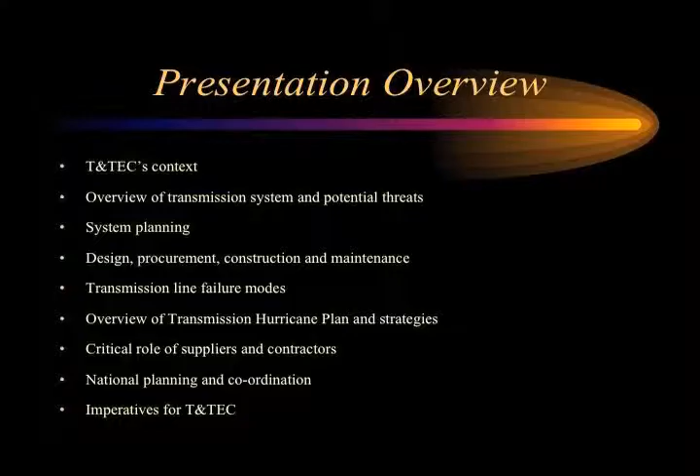T&TEC was established by Ordinance in 1945 and by Act in 1970. We have about 440,000 customers, all metered through the automatic metering infrastructure, 2,700 employees, and approximate sales of 8,500 gigawatt hours. Current peak demand is 1,332 megawatts, and our generation is private, so we have IPPs, three generating stations: PowerGen, Trinity, and TGU. We have our own generation in Tobago, Cove generation. We have one of the lowest rates in the region, 6 US cents per kilowatt hour, and of course we are regulated by the Regulated Industries Commission.

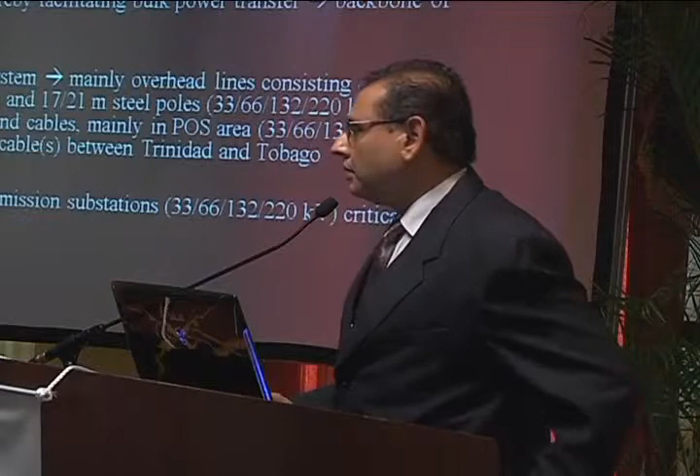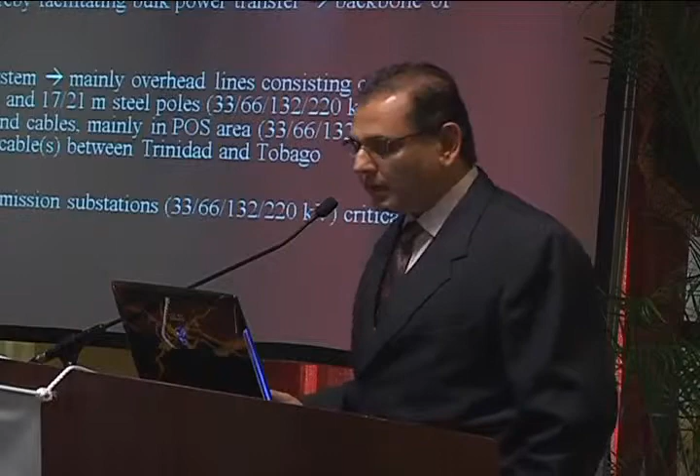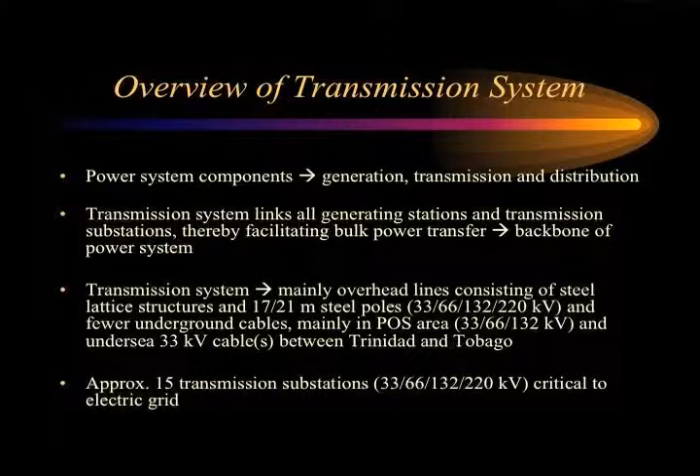Just an overview of the transmission system. Generation, transmission, and distribution all make up the components of the power system. The transmission system plays the role of linking all generation stations to transmission substations and each other. In the case of T&TEC, the transmission consists mainly of steel lattice structures and poles, 17 and 21 meter poles. Our voltages go from 33,000 to 220,000 volts, and we have underground cables, mainly in the Port of Spain area, from 33 up to soon to be 132 kV. There is an undersea cable linking Trinidad and Tobago that operates at 33 kilovolts. We have approximately 15 transmission stations that are critical to the grid, and a few of them are super critical in the sense that if they go down, most of the country will go black.

Potential threats: we're looking at this presentation from the natural disaster standpoint. Overhead lines, hurricanes, as we heard before, the previous speaker spoke to that. Lightning as well, and I was happy to hear this morning the Caribbean Meteorological Office talking about predicting lightning or developing lightning models. That'll come in handy for some of the management of lightning, landslides, and flooding.

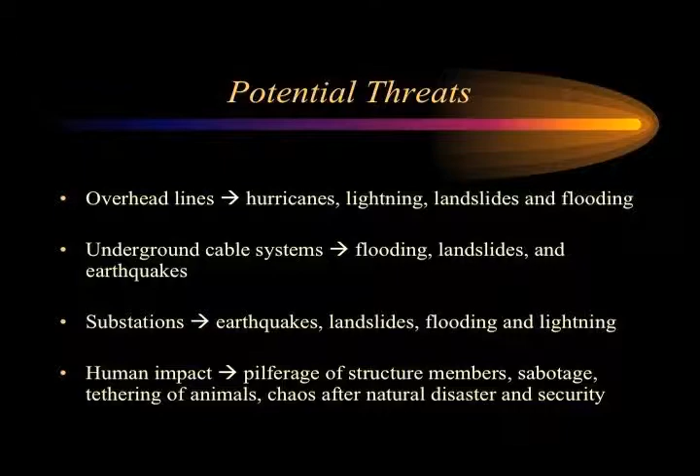Underground systems are susceptible to flooding, landslides, and earthquakes. Earthquakes affect the cable systems and the distribution systems more than the transmission because of concentrated loads. Of course, the substations are affected by earthquakes - earthquake, landslides, flooding, and lightning. These are the kinds of potential threats we have.

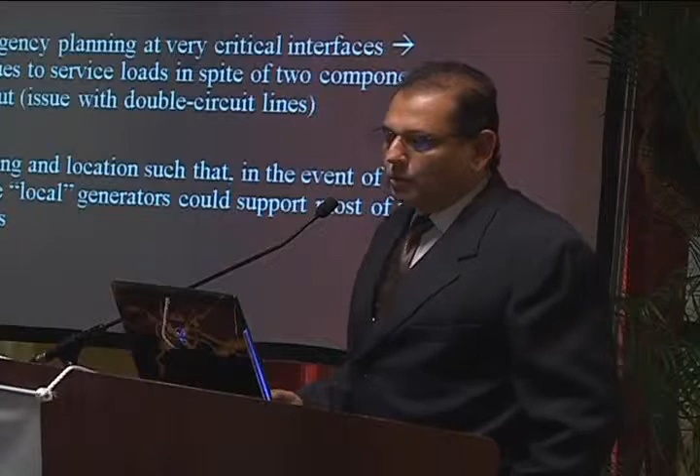If we look at the activities to establish any system infrastructure, there's the planning aspect. What we do, we have single planning contingency, that is, if one component is out, the system could survive and carry the load. We have double contingency as well for critical interfaces.

Where we have more than 5 lines or so terminated in a particular area, we design for double contingencies. A lot of our major circuits are double circuits. Double circuit means you've got 2 circuits on one structure. That has a weakness in the sense that if you lose the structure, you lose 2 circuits, so it's like a double contingency for one event. I'll talk about that a little later.

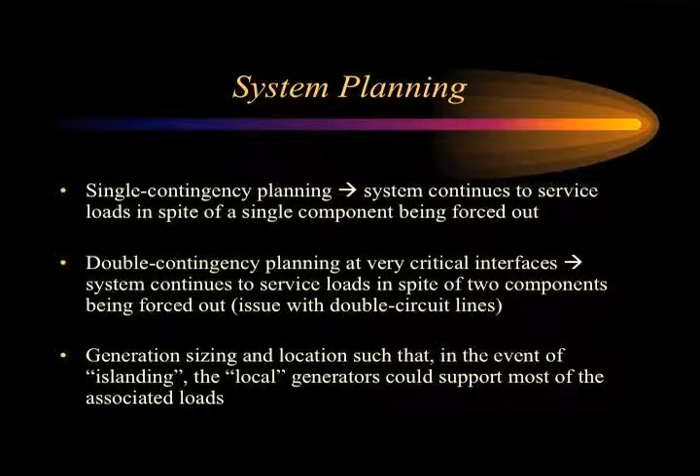Generation, sizing, and location. What happened in Trinidad is our generating sites are located in such a way that if we have islanding - and what is islanding? Islanding is if you have major transmission disruption, the system breaks up into so-called islands where Port of Spain could be disconnected from Point Lisas and San Fernando and so on. And the generation in the locality would be able to carry most of the load. That is not a deliberate design, but it has come out of the planning for generation close to load centers.

So the way we have it right now, Tobago can run on its own with the new plant there. In fact, the plant is about nearly 1.5 to 1.75 times the load in Tobago. South is more than adequate with the new generation - it can support itself and feed the rest of the country. Point Lisas, close to this area, could take care of the central.

The challenge is in Port of Spain. That plant was at 300 megawatts and could have sustained Port of Spain and the near environs, but the plant is the oldest plant and it's soon to be decommissioned, so it's really not reliable. So if we do have such an event of islanding, hardly likely that station will be able to sustain Port of Spain. Design.

Routes. Line routes - this is very important in terms of reliability and even security. If we're looking at the single contingency, obviously it would be better to route one line or one circuit, and the second circuit will be far apart. The constraint really being the land, available land. And in Trinidad, we have quite a constraint in the available land for routing lines and even substation sites.

What I've said in the first point is our major transmission is on the western side of the country, and that has happened because of the industrial development. It stretches from La Brea south up to Port of Spain, and it's almost on the west coast. So the major transmission is on the western side, which is good in a sense that if we looked at the hurricane belt and the slide that Engineer Gibbs showed us, Tobago is more susceptible to higher wind speeds and the northeast Trinidad, but the south and the western is less susceptible.

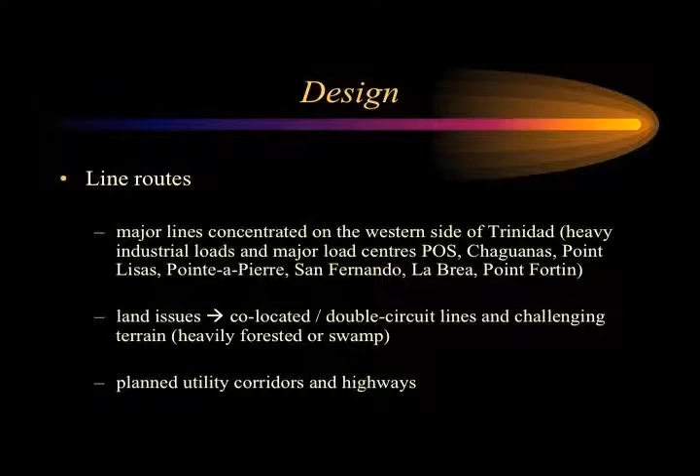Downside is that some of the infrastructure is very close, and in fact the 132 kV intended route is on the waterfront. So if we have any kind of storm surge and so on in the Gulf, it could affect some of the infrastructure. We discussed the co-located lines - because of land issues, we have to co-locate lines, and we have the double circuit. And of course we have challenging terrain like heavily forested or swamp areas. Engineer Williams spoke about that and the effect of vegetation management and so on.

What I think we lack in the country is coordination for planned utility corridors and highways. These could do well - joint corridors would make better use of the land, and we can discuss disaster planning with the joint and coordinated corridors approach from the planning stage.

Substation design - we're looking at close to load centers. Generally, we locate substations close to load centers. Now, we had a lot of discussion earlier before the break on flooding, so there's really more detail on flood design and so on. But generally speaking, we have the turtleback design and, of course, the drainage with all the hydrology that goes with it.

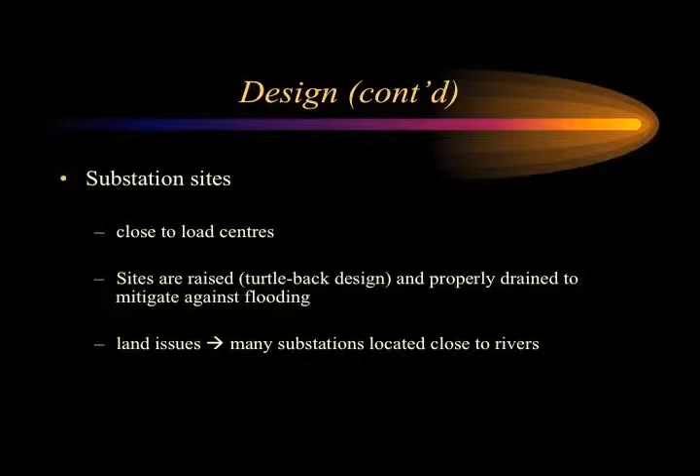Problem in Trinidad: land issues, and many of our substations are located close to rivers. In fact, 2 to 2.5 years ago, one of our major transmission substations was flooded out. The way it's located, it's almost like in the center of a bowl - it's the Harmony Hall station close to Ready Mix at Gasparillo.

The roadway is higher than the substation, and the river is close to the substation, so the water will naturally collect there. As Dr. Khan mentioned before about pollution in the rivers from dumping garbage and so on, that contributed a lot to the backup. The Guaracara River flooded and we suffered some issues there.

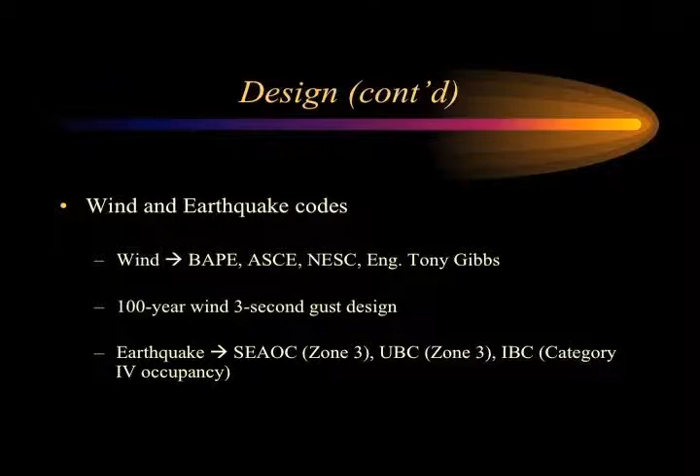At one point we spoke with Professor Chin about the use of the CUBiC. He was invited into TNTEC around 1998 or so to see the application of the CUBiC, if we could use it in our design. So that discussion has to go on. I think Engineer Gibbs spoke about that this morning. We need to get the relevant codes and applications to the region.

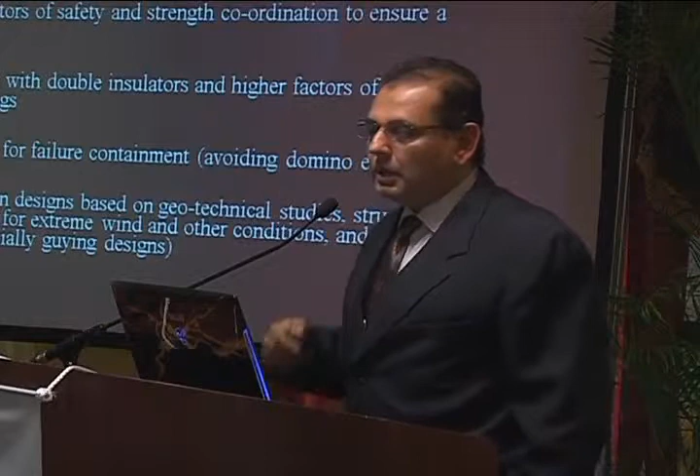In terms of the line itself, the structures are designed for various mechanical conditions, including broken wires - everyday winds, high-speed winds, broken conditions, and appropriate safety factors. So one designs for certain failures that will naturally occur, and designs the structures to withstand these problems. We'll talk about strength coordination a little later, in terms of how the whole transmission line and different components interact with one another.

Some of the recent design improvements we've made: we use strain structures with double insulators and higher factors of safety at highway crossings. So imagine these things crossing highways - in a hurricane event or any natural disaster, we want stronger structures at those points. We also look at strain structures for failure containment.

Now, this isn't so much a problem in Trinidad because we hardly have a straight line between points - we always have lots of turns because of features and land issues. So inherently we have lots of strain structures per kilometer in our line. But in places like the States, where you have hundreds of miles of line and a good section could be a few tens of miles, you get a domino effect - if you lose a structure, many of the suspension structures fail. So that's failure containment using strain structures.

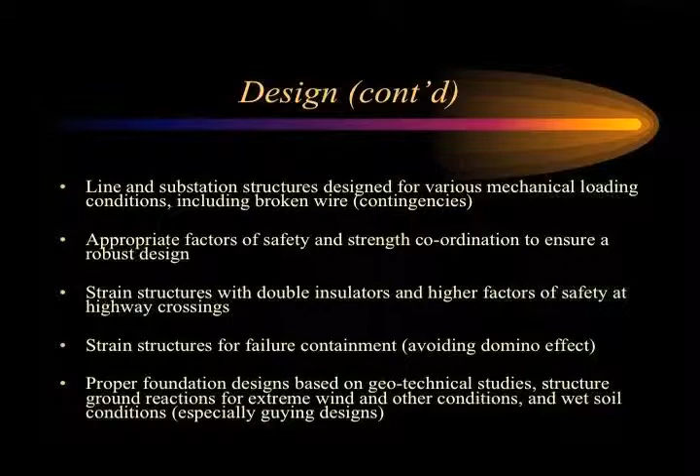Now, proper foundation design - the speaker before mentioned foundation designs and guying designs. Obviously this is standard civil engineering practice. But especially for guying designs, we have standard guying arrangements, though one guying arrangement wouldn't satisfy all soil type conditions. We also have to consider the effect if you have wet soils or wet conditions - would the guys be effective? That's something we look at, especially at the transmission poles.

Okay, we went back there, so we go forward - that was revision. In terms of lightning, these are standard practices, nothing cutting-edge here, but something we need to address. We look at the highest keraunic level at Piarco, but now with weather systems mapping lightning a little better, I suppose we'll get better information.

Of course, the standard practice of surge arresters at the interface - lightning will come with the storms and could knock out the system, damage equipment, etc. So we need to design for lightning and appropriate basic insulation levels and so on. It's not a lecture on insulation coordination, but just to mention some things we need to do. It's important to have low footing resistance to prevent back flashovers, which means you can have an outage from lightning that doesn't strike the conductor directly.

Sufficient electrical clearances, line corridor widths, and building setbacks are needed. This depends on the policy of the utility, and our policy is to keep the lights on during the hurricane. You need to cater for blowout.

Now, this is not electrical blowout, this is the mechanical movement, or physical movement of the conductor with high wind. So you need to set sufficient clearance from buildings and other structures or other lines so that you don't cause electrical shock or damage or trips. This means, of course, it could entail having wider corridors and land issues. So that is something to bear in mind.

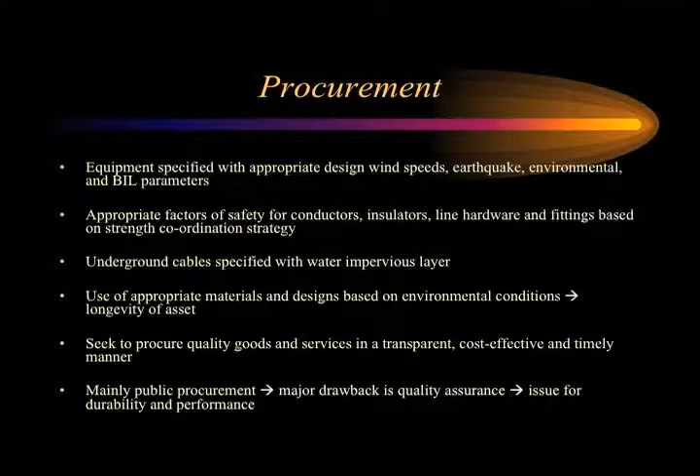Let's look at procurement. Of course, the equipment must be specified with the proper design, wind speeds, earthquake criterion, environmental and BIL parameters. Appropriate factors of safety for the different elements of the line hardware. Now, in our case, I suppose most utilities, underground cables, we specify an impervious layer, so we expect flooding and so on. So if it's impervious, it will improve the performance.

Of course, the appropriate materials for the environment, if it's coastal, if it is highly corrosive, etc., then this is key, and we have a major challenge in Trinidad to procure quality goods and services. We have to use, by and large, public procurement. As I said in the first slide, we are a public utility, not private, so we have to do public procurement, and we do get quality issues. And this is very critical, and I could never overstate the importance of having quality materials.

Construction, of course, must have the competent workforce and a contractor. Again, we talked about goods and services, so you may have good materials, good designs, everything, and if your construction is poor, it doesn't work. So proper construction techniques, tight quality control during construction, material specification, and so on.

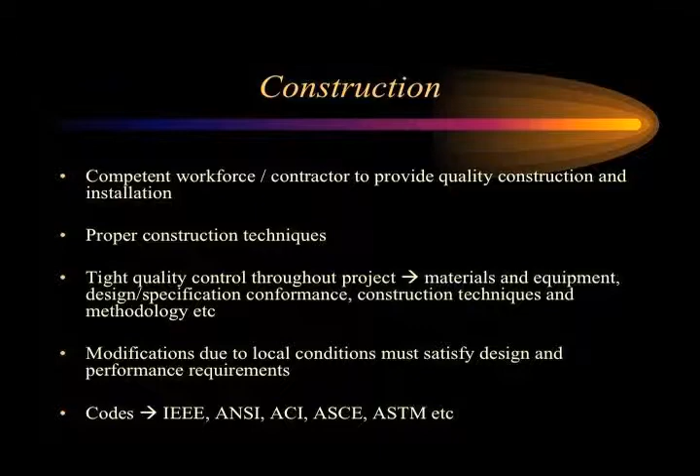One thing though, not everything on paper, you design on paper, could happen out in the field. So if you have to make any changes, it must satisfy the design and performance requirements. And those have to be vetted. So you just don't make changes. Our contractors have the temptation to change the design out there, thinking that they know how it will work, but that has to be verified and so on. And of course, the codes we use there for construction.

Maintenance is critical, and some speaker before mentioned it, and we are weak in this area, whether it's drains or generally speaking. Periodic inspections on infrastructure to identify the condition. Planned maintenance based on that information. Aggressive vegetation management. Of course, our problem is land issue versus expanded right-of-way. There's always a trade-off there.

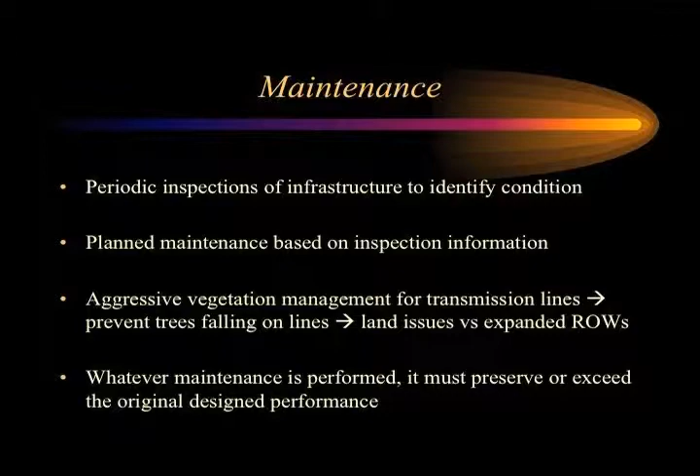Then, in the case of maintenance, whenever it's performed, many times we have quick fixes, and it compromises the original design and performance specifications of the line. So we have to ensure that whatever maintenance we do, it must restore the original or exceed it.

Recently, a couple of years now, they're talking about utility hardening. What utility hardening really is, is to improve the infrastructure to meet the worsening weather systems, and as was predicted, we'll have worse weather conditions in the future from the point of view of storms and so on. So if maintenance is done or refurbishment, we could look at hardening, looking at higher wind codes or higher earthquake design, whatever's appropriate. Of course, everything we got to balance with cost.

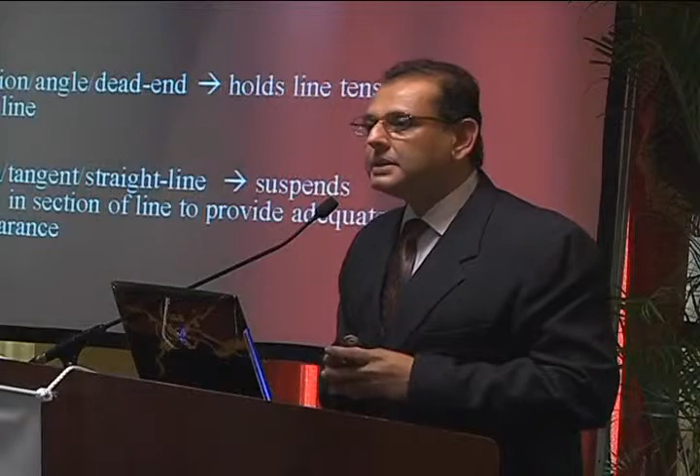Let's look at the transmission line failure modes. Components, basically the foundation, the structure, the conductors, and the insulator line. A term I learned from Engineer Gibbs is that a transmission structure could be considered as an aeroelastic structure. So think of the whole thing as one.

Two types of structures generally: we have the strain, tension - these are different names for the same thing - strain, tension, angle, dead end, which basically holds the tension of the line. Then we have the support structures, which will be the tangent, the suspension structures.

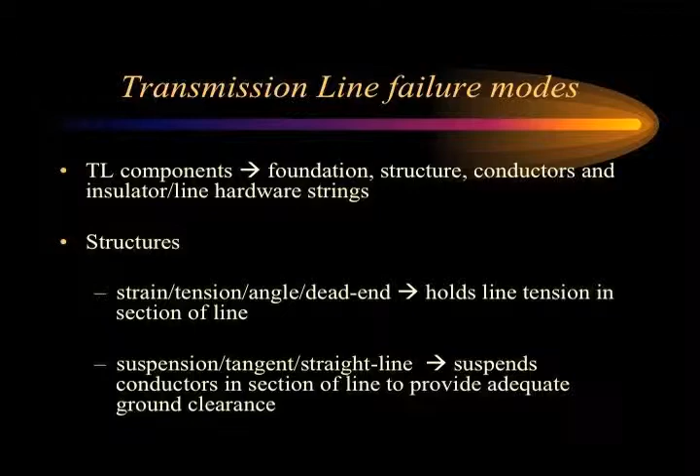The problem is, if you lose the strain, you have more damage. But if you lose a suspension, chances are the conductor will hold up the structure. You will see that happening in many cases.

Failure modes: of course, if we have soil erosion, landslides, earthquakes, human impact, these could affect the foundation, weakening its capability to withstand any event.

Structure failure, the broken conductor, broken member or burst wire, because the whole thing works as one structure, and they work in tandem. Failed insulator strings, that's another component.

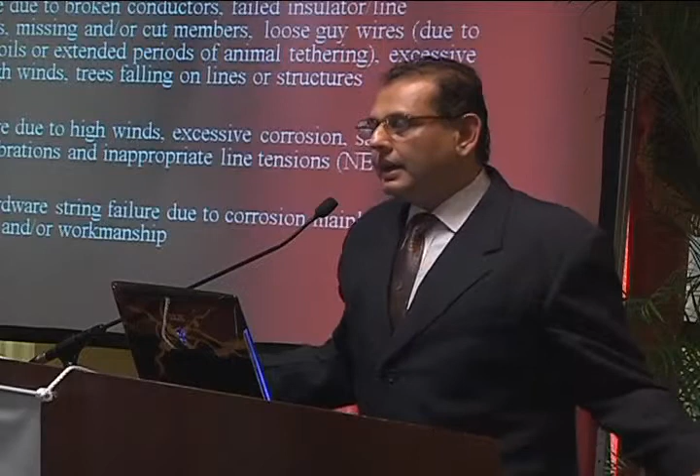Missing or cut members, I mentioned the pilferage or sabotage. Loose guy wires, and these things happen especially during wet conditions where the guy blocks might pull out, and we have a problem there. Or because of excessive periods of tethering of animals.

And of course, excessive corrosion. So your components could be corroded and would not withstand events like high winds, fallen trees, etc.

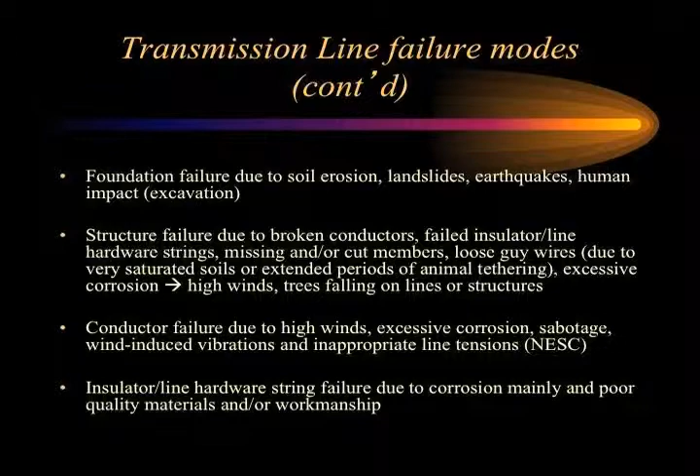Conductor failure due to high winds, corrosion, sabotage, wind-induced issues, and inappropriate line tension. That is very critical - the line tension is one of the most important things you need to monitor during construction. People tend to do stringing by sight, but we need to reference it to the proper design tensions. Insulator, hardware, and string failure due to corrosion - we've had those problems.

So these are all things we need to look at.

One could say, let me have a very strong structure, say go 2.5 or something, take a 1 on the conductor, and probably go low on the insulator. The problem is, if during a hurricane event you lose your conductor string or your insulator breaks, you subject the foundation and structure to very severe loads.

Those could be prevented if you put more strength in the conductor and the insulators, letting the line withstand the hurricane force winds so that you don't have that problem. So this is an approach.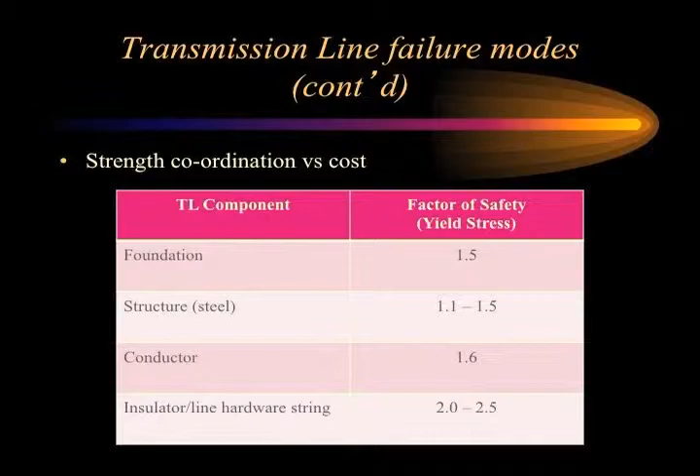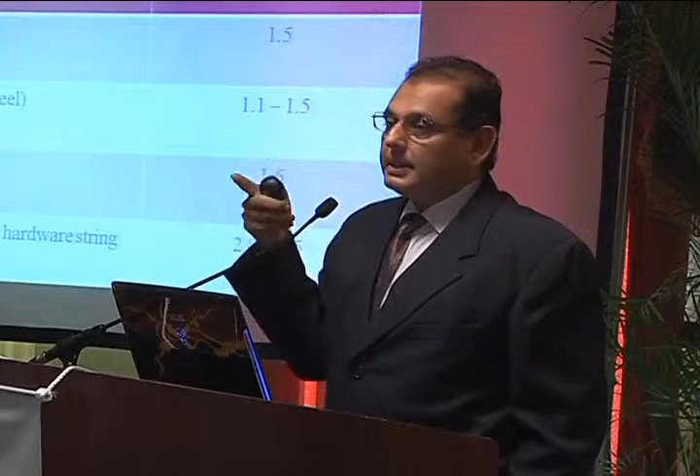Some utilities would take the foundation factor of safety a little lower than 1.5. They allow the structure to lean, so that if the foundation is at a reduced factor of safety, the structure, if it leans, wouldn't have to withstand that full force. Their policy is to de-energize the line before the event, allowing it to lean, then they come back, straighten it, and energize it. T&TEC, of course, we keep it going as long as we could.

Now, let's look at the hurricane plan and some of the strategies. Some have been well dealt with by the previous speaker, so I'll run through that quickly.

Here, our main feeder of fuel is natural gas, so we depend on the offshore platform. Depending on the severity, after the warning is announced, platforms may either shut down or go on autopilot. We continue our operation during the storm, and the power stations obviously continue - we can't continue without the power station.

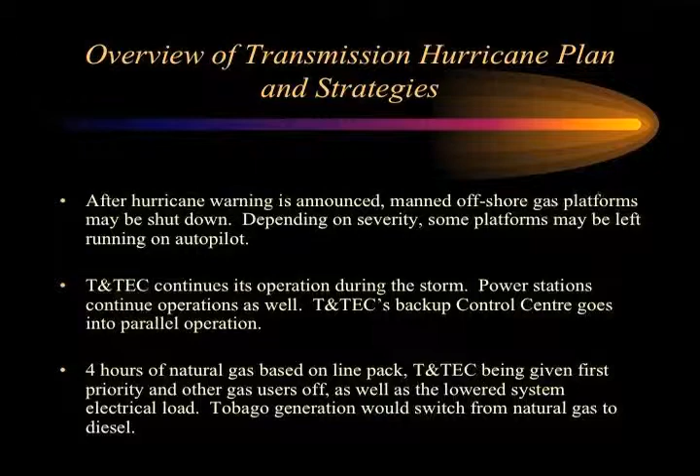The backup control center - T&TEC has established a backup control center in Central. We have the main one in Mount Hope. So those go into parallel operations.

Now, how do we get it? If we shut down gas platforms, how do we get gas to supply? Well, what happens is in the transmission line there's a line pack, and that's what we use to run the system. In Tobago, we have the facility to switch now back from gas to diesel, so we could go to diesel in Tobago, keep that running, and use the line pack to operate the system.

The only thing is we only have about 4 hours of operation because, of course, we'll reduce the electrical load - we only have priority loads given. T&TEC is given first priority in natural gas, and we have about 4 hours based on the current system. So if the storm lasts longer than that - but I don't think so - Engineer Gibbs could see if 4 hours is good enough.

Okay, the overview of the system, quite similar to what my colleagues said before. Crews, tools, equipment, etc. are deployed to various operating centers in preparation for the hurricane.

I saw some of this. I was going up to Orlando in, I think it was 2008, and there was this hurricane, tropical storm Fay, and it was following me.

I don't know why. Driving on the turnpike going up to Orlando, I'm seeing these trucks going down from Progress Energy and Florida Power. I said, oh God, what a time I chose to come here for holiday. But anyway, they were preparing for the storm.

Another thing to mention, and I know the speaker mentioned it before about the underground system: whilst it is better from the wind standpoint, the wind impact, the flooding could pose a problem to underground systems. Brevard County and some of the other counties couldn't restore supply because of the flood. Fay was quite a wet storm, and it was lazy, so it was dumping a lot of rainfall.

A lot of these systems were underground, submerged with the floods, and the crews could not restore power till it was safe. So that is a drawback.

The other drawback with underground systems, apart from for transmission at 66 kV and above, is it's very expensive. But the other drawback is if you have a failure, it takes much longer to restore than an overhead line system. So it's something we need to take into account in deciding.

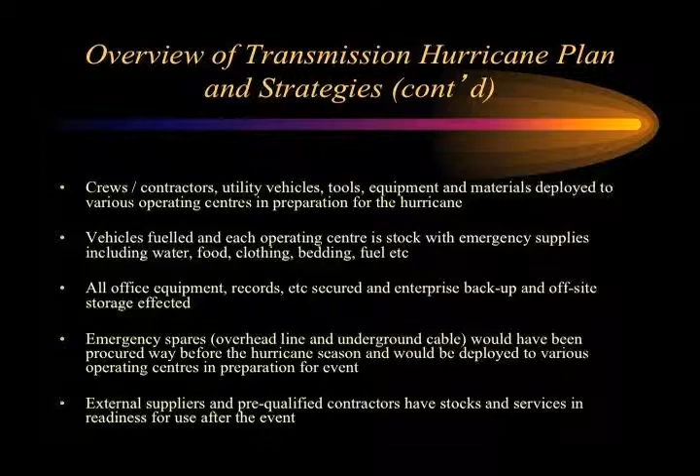And we set up contracts and so on with external suppliers and pre-qualified contractors, to have stocks and services in readiness for use after the event, for the restoration effort.

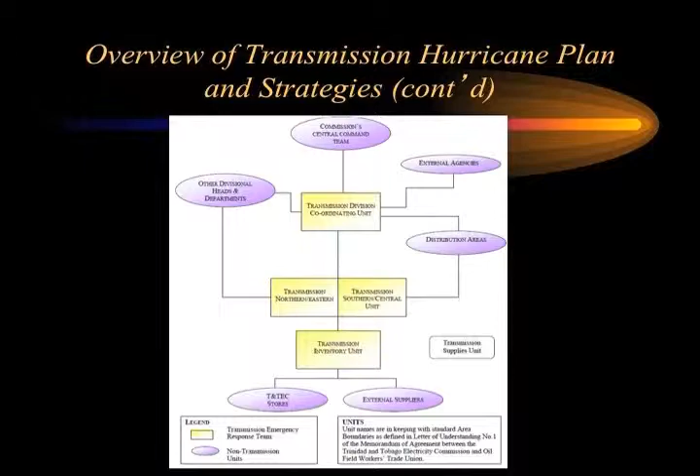This here is just an overview of the transmission plan. We have the command center, which will involve all divisional heads and the general manager. They will liaise with all the external agencies for the national coordination event, okay?

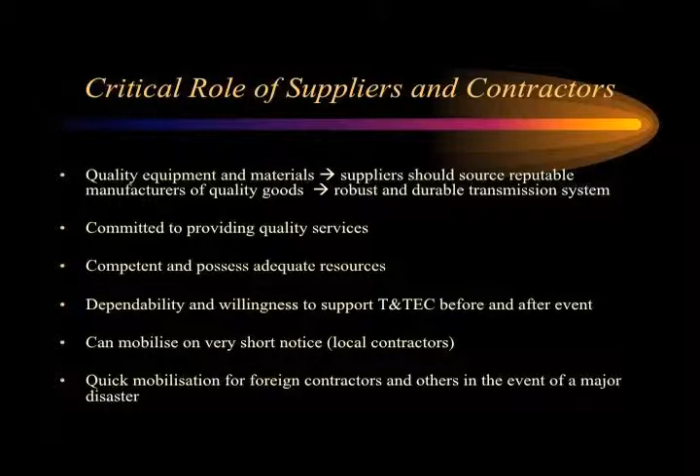And of course, the external agencies and so on. So that was spoken to before. We spoke about this, I wouldn't go into detail here, but the key thing is quality materials and quality construction. That is key, apart from your quality design and procurement, national planning and coordination.

This is important, especially for shared corridors. Unfortunately, in Trinidad, we develop our corridors - each utility will go on its own, and we don't have planned corridors. We also don't look at the effects of failure of one utility on another. So some utility might fail during some event, and that could affect another utility.

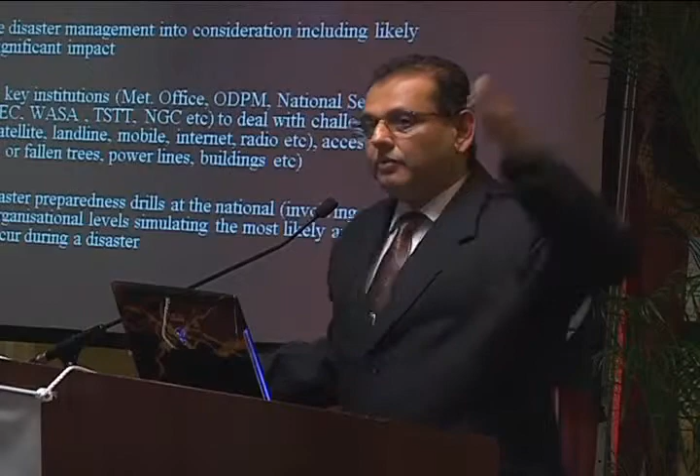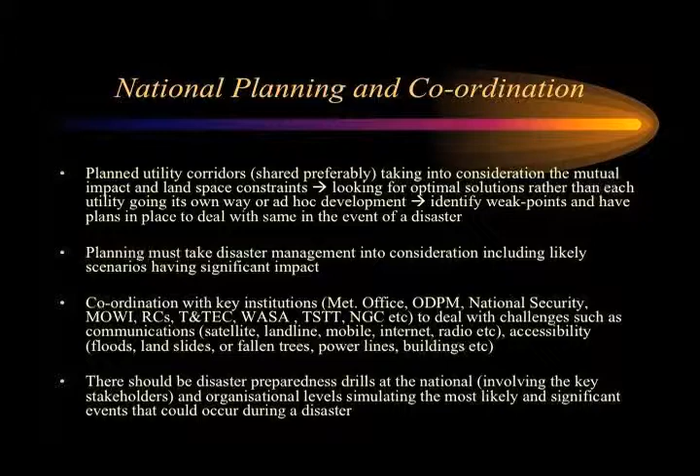So these are some of the things we need to do. Coordination, everybody spoke about that, the coordination with key institutions. And of course, the communication - our speaker before mentioned communication. In Progress Energy, they mentioned satellite phones might be necessary when other phones are down, and I know we have one satellite phone from the ODPM.

I'm suggesting that we should have national drills. In Trinidad, we don't get tested too much as other countries do, so we should have some national drills and go through some of these exercises to see how prepared we are for natural disasters.

First, in T&TEC's imperatives, we have a lot of aged infrastructure, so it's vulnerable. Refurbishment and replacement, hardening of that infrastructure is critical, but capital intensive. Susceptible critical locations need to be relocated or redesigned for those problems.

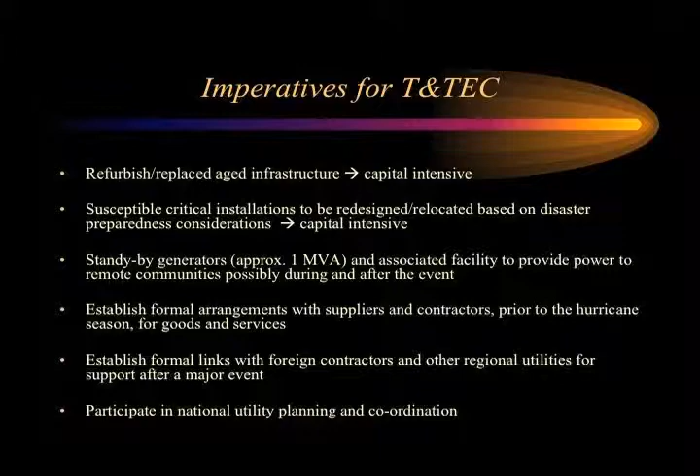The standby generators - the speaker before mentioned that - the government, and previous governments, have given us monies for setting up standby, I think it's 1 MVA plants, at critical locations all over, so that they could run on their own after the event.

Formal arrangements with suppliers. A key thing here is foreign contractors and other regional utilities. Just as my friend mentioned, Grenada depended on Jamaica and Trinidad, so too we would depend on them for things, but for other things we'd depend on Latin American contractors and suppliers to help us. And of course, we need to participate in our national planning and coordination.